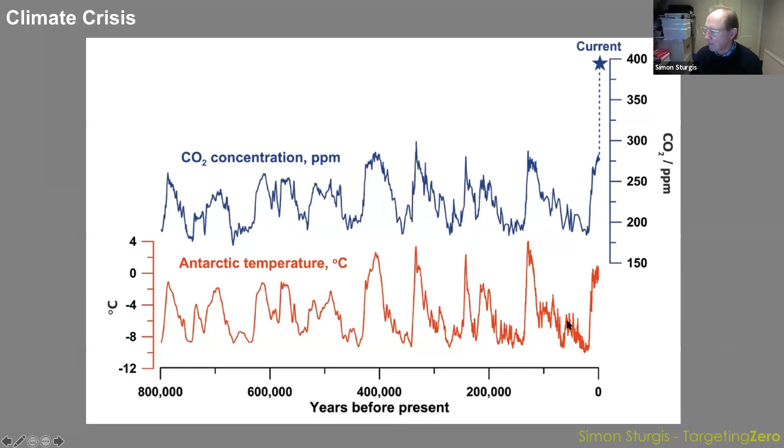Now, the disturbing bit is the top right-hand corner. You can see that carbon emissions are no longer following that rough cycle, but they have jumped right up. In fact, they're above 400 now. When this graph was done, only a few months ago, and since then it's got worse. So the concern and the prediction is that the temperatures are going to follow suit. That is the basic bit behind this.

Without going through these in great detail, you'll notice that fundamentally the same people are offending, whether it's carbon emissions or resources. And in fact, the way we operate in the UK is about 3 globes worth, if everybody was to live like us.

So what I'm interested in is the carbon emissions from taking resources from the natural environment, turning them into buildings, using them over the life of buildings, and then what happens to them at the end of the life, and the carbon emissions associated with all of that.

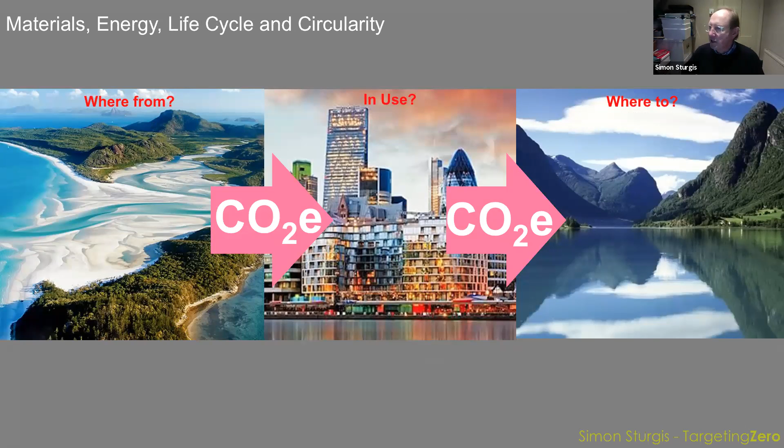We're all used to operational emissions, the use of energy which can generate carbon emissions. But what's also very important is the embodied emissions, which come from construction, material fabrication, and maintenance, repair, and replacement. Very crudely, these are roughly equivalent—not exactly the same. In some buildings one will be much more than the other, but they're not massively different, and they're also linked.

Activity in one area can produce impacts in the other area, and of course they will have a direct impact on global warming.

All of that filters through into guidance produced by different organizations. But it's also important to consider the investment context, because the world of money is starting to take note. They're worried about it because of risk, and it's going to cost them something.

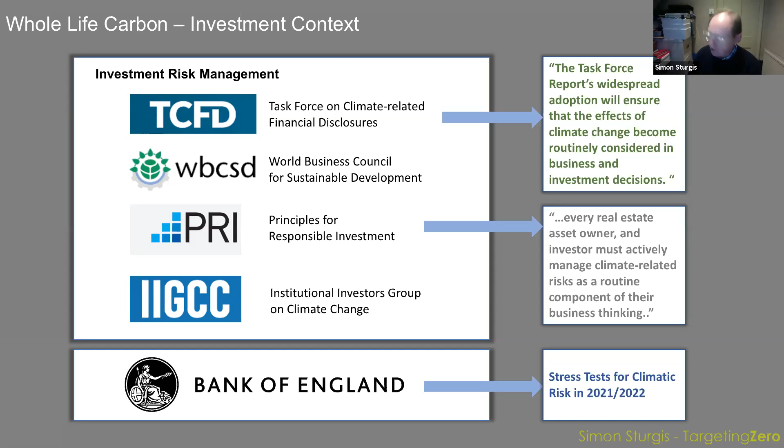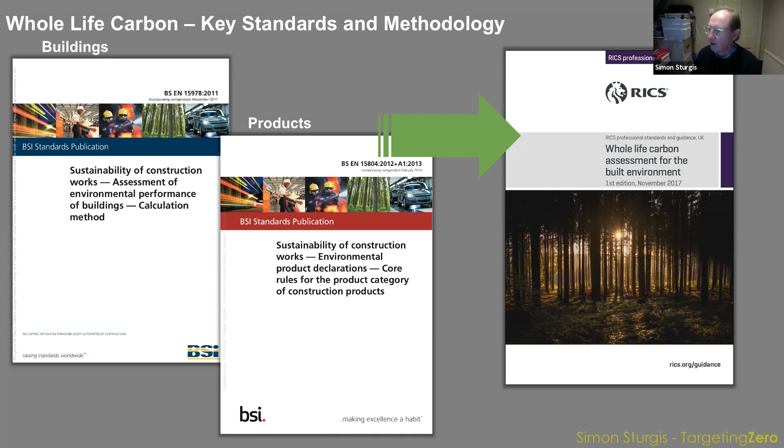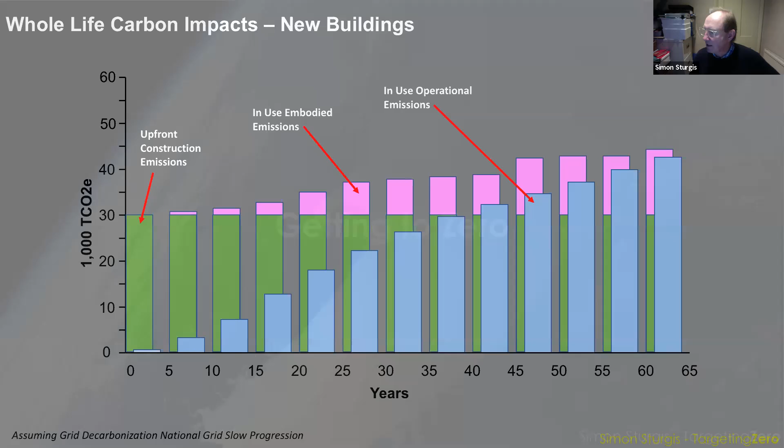So getting to zero, how do we get down to zero? There's a range of things that, in a practical design sense, are the things you would consider in order to reduce the numbers, but also make practical sense.

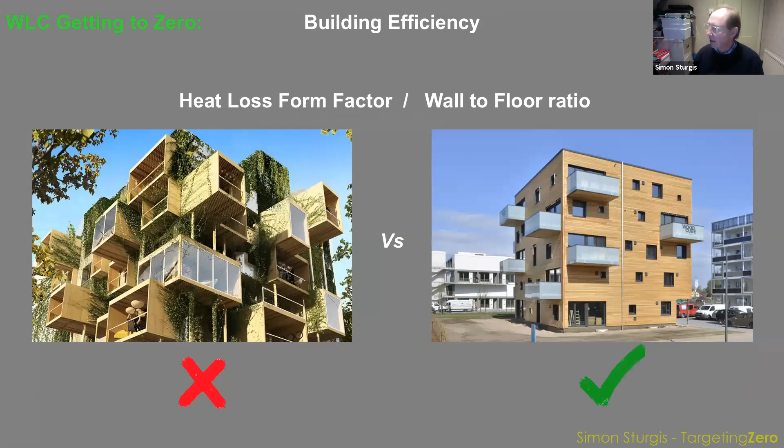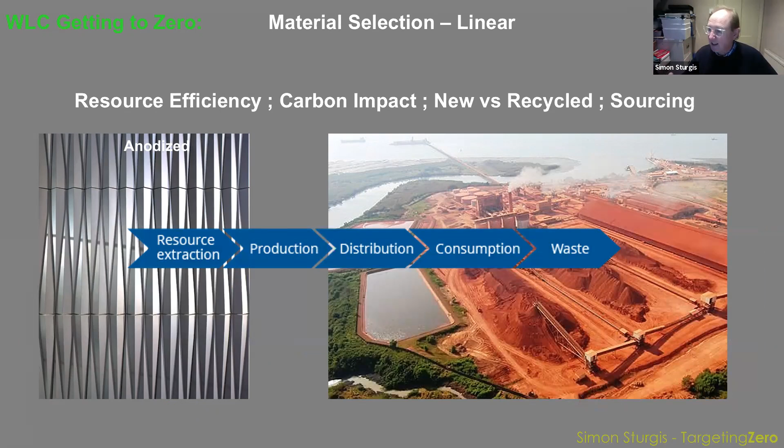Then material choice is a sort of linear versus circular issue, and this example shows anodized aluminium, which because of its nature requires a consistent color for the aluminium, because the anodizing is a very thin chemical reaction to the surface. To do that, you have to have virgin aluminium, so it has to come from somewhere—that happens to be in Australia. If, on the other hand, you use powder coating, which is effectively a paint, you can use recycled aluminium. But of course, you also have to consider things like the lifecycle options and so on. The point I'm making really here is that a seemingly simple choice about something like finish can have a big knock-on impact in carbon emissions.

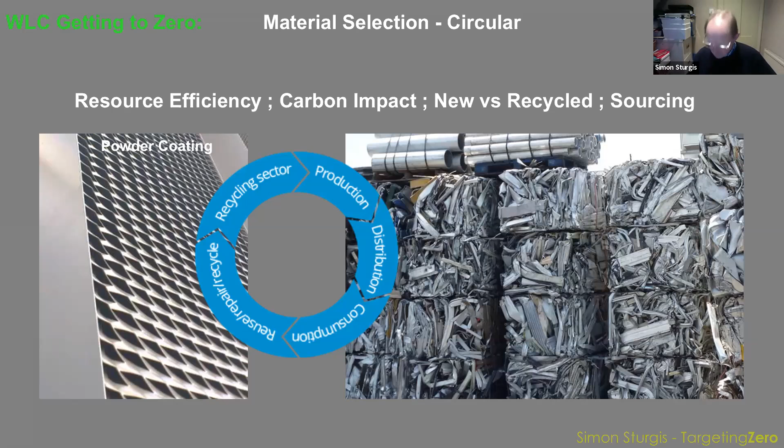So the linear economy is pretty much what it says: you get a material, you turn it into a product, you use it, and it goes into the bin. A recycling economy is better in the sense that you reuse things, but ultimately it ends up in the bin as well. And a circular economy is obviously idealistic, but it's where everything gets reused and is designed to be reused, and nothing ends up being thrown away.

Products and construction - MMC, modern methods of construction, is the ability to make things in a factory, which reduces waste and damage. Also, the ability to disassemble buildings, shown on the right, is an important part of how buildings or their components may be used in the future.

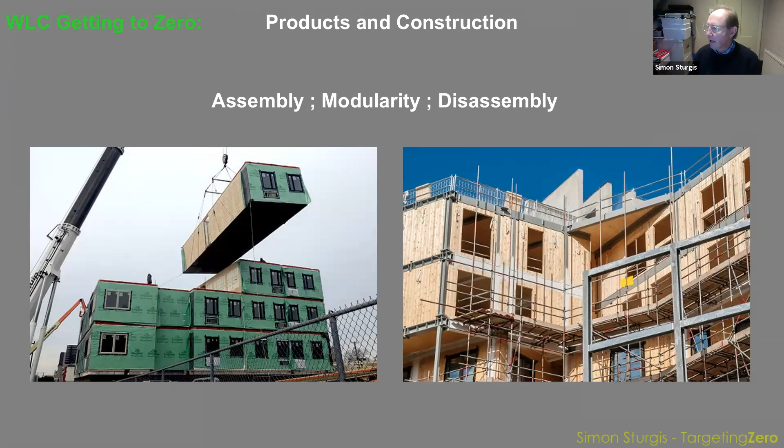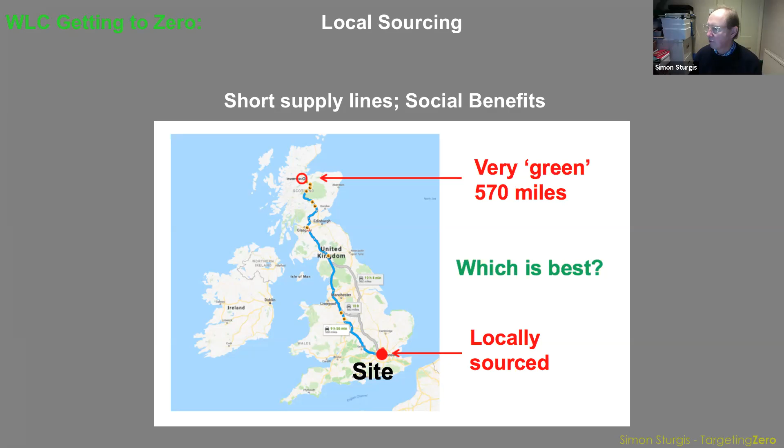Local sourcing has short supply lines, less diesel use, but also social benefits. This map illustrates getting something very green, but from Inverness. Is that better or worse than getting something locally sourced which maybe isn't quite so green? It depends on the detail, but it makes the point that it's not automatically good to get a green product - you need to know where it's come from and how it's got to you. This is really about operational and embodied emissions being considered together.

This example of use of resources - natural ventilation - is the Everyman Theatre, Stirling Prize winner, by Haworth Tompkins Architects. On the roof, they built cooling towers out of brick, which supplanted mechanical plant. So you had an embodied saving and an operational saving, but you'd have to balance those out and understand how this worked.

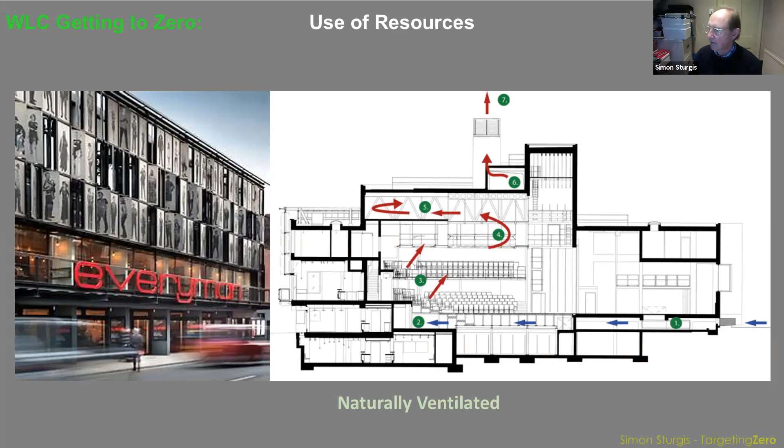In terms of cost, here's an example - this was the Google building in London, King's Cross. We found that in every single tender, the lowest carbon option was also the lowest cost, which demonstrated that the image of sustainability being expensive is not necessarily true at all.

This was also demonstrated in a study we did for a developer on a finished building. Looking at those four columns, the left-hand column shows the as-built carbon emissions. The next one along shows what we demonstrated could have been done. The QS said those reductions were 75% cost neutral - they weren't strange technology, just perfectly straightforward choices. The other 25% was capable of being tendered, they felt. So this is not an expensive business - it's actually about more efficient use of resources.

Life cycle is very important. This graph on the right looks at the replacement cycles of components, overlaid with the blue bands, which are lease cycles, to see how efficient the whole life of the building is likely to be. Overlaid with that is the yellow, an impression of global warming. Can your building be readily adapted in the future, or is that really complicated to do? It's about thinking long term about the life of our buildings.

I think we're all familiar with this kind of Victorian terrace house, which probably has as many variations as possible, ad infinitum, but they've proven a really popular, successful, adaptable, durable and flexible building type.

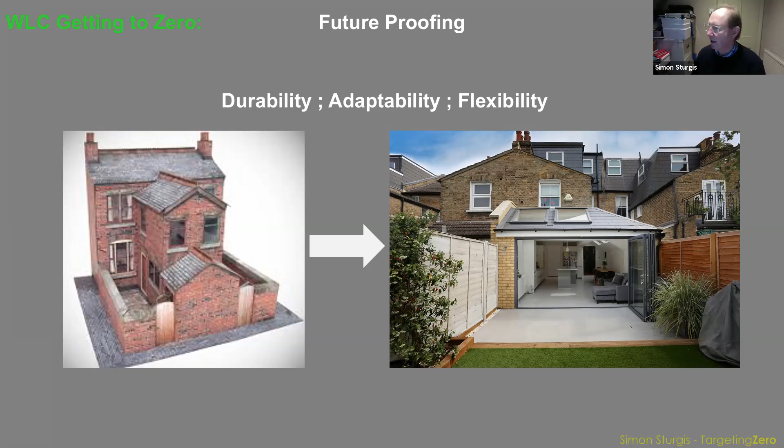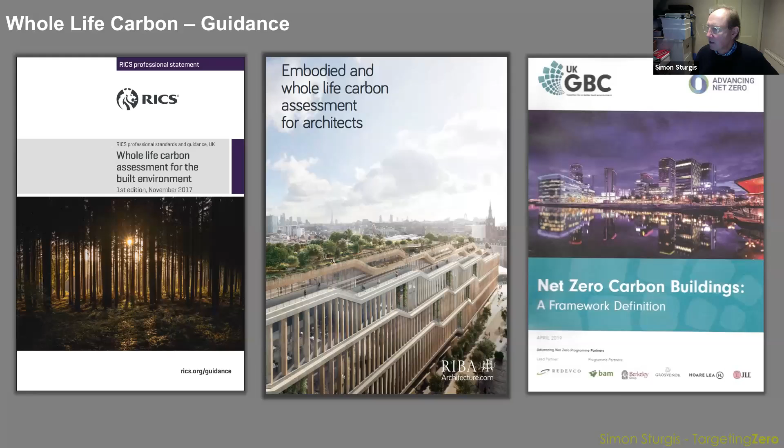And frankly, as we're all working for clients, it reduces the risk of obsolescence of their building. So thank you very much, that's me done.

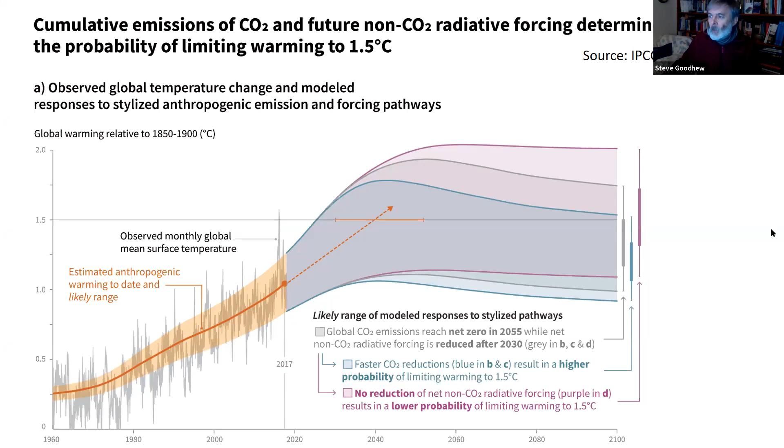As you can see, that orange line in the middle is the anthropogenic warming which has taken place since 1960. As per Simon's graphs, it looks like we are going to be hitting approximately 1.5 degrees relative warming by approximately 2040. One of the main drivers for this is cement emissions, and I'll show you that in a second.

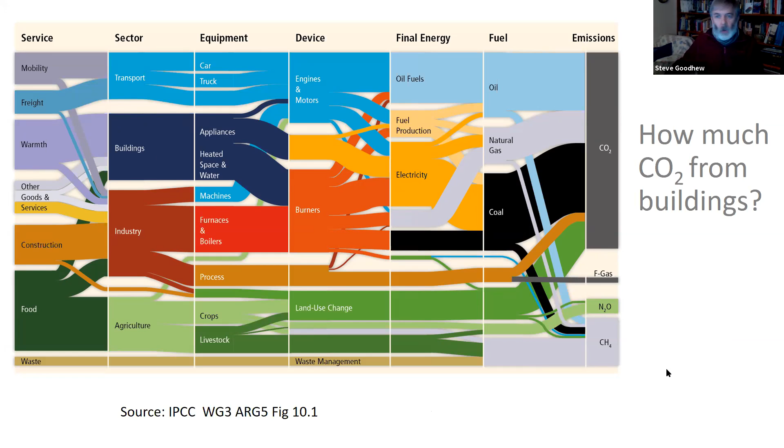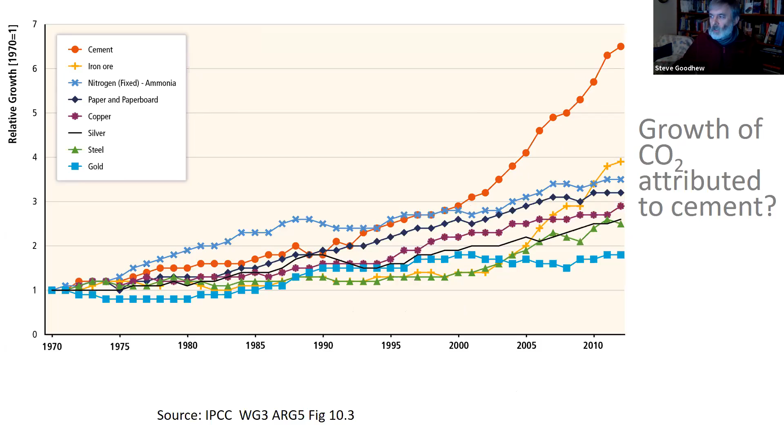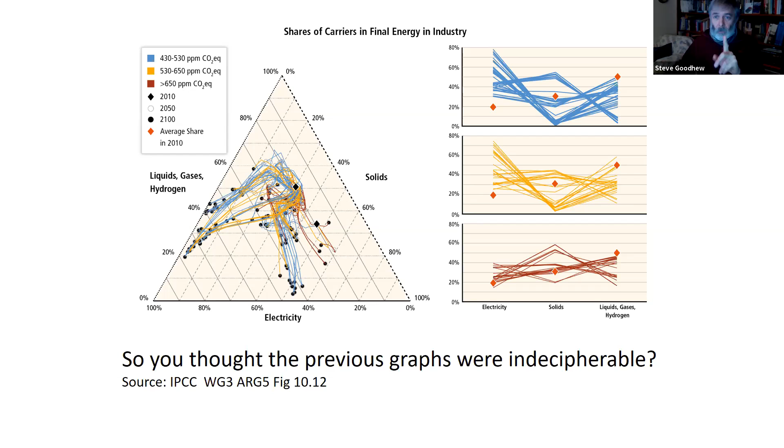Just to let you know that not all graphs are really, really appalling except for this one. I just wanted to put this one in just as a bit of light relief, just to say I can't understand it, and I'm not sure anybody else does. So feel free to send some comments about some of the other ones that I've been putting up.

So therefore, what are we going to need to do? Well, we need to avoid the use of high energy materials like cement, except where necessary. As Simon said, there's a durability aspect to our buildings. We need to make them low maintenance as well. And we need to reduce the amount of waste that goes to landfill. So we need to really be able to build with a material that does those things.

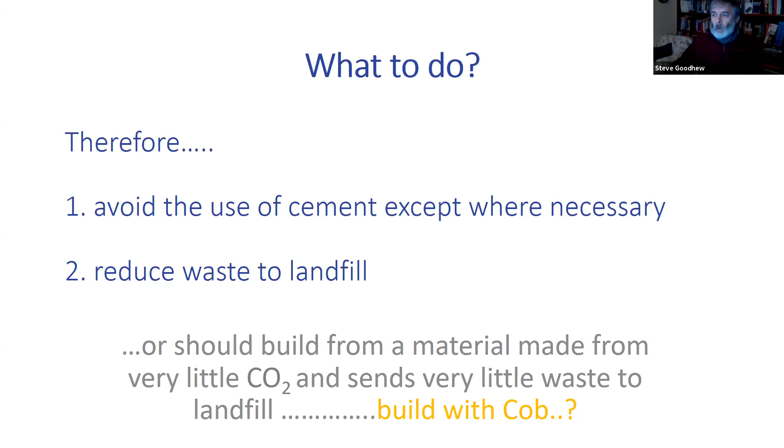One of the opportunities that we've got is to build with a lot of natural materials, and in particular cob. Now, the reason for coming down to cob, as far as the CobBauge project's concerned, is it's a vernacular material which has been used a lot in the southwest of the UK and also in northern France. So it's a familiar material, a familiar type of building. So why not build more with this?

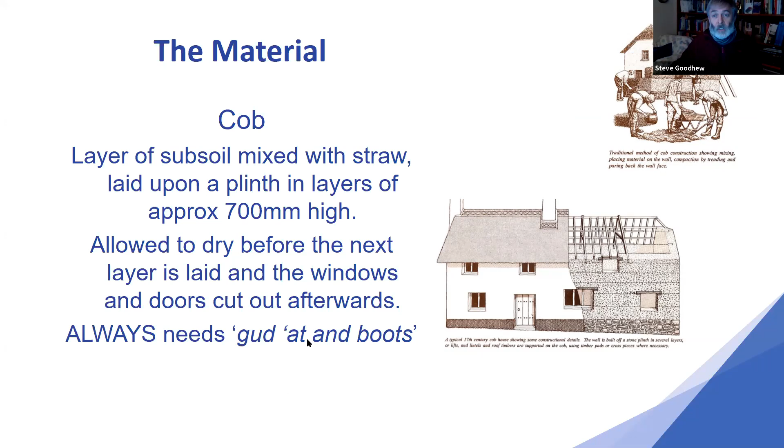Cob is a mixture of subsoil and straw built in approximately 700mm layers on top of each other and topped off with an appropriate roof. This is the way it would have been built a long time ago, around the turn of not this century, but the previous century. The main adage was that you always needed to give it a good hat and a good pair of boots. In other words, you needed to keep the water off the top and off the bottom, because that was what would make the material deteriorate.

But there are many properties in and around the southwest of England and in northern France that are well over 200 years old that have been built with the material. So it is a durable material if built properly. So if you're going to build with it again, what's stopping us? Why can't we build with it now?

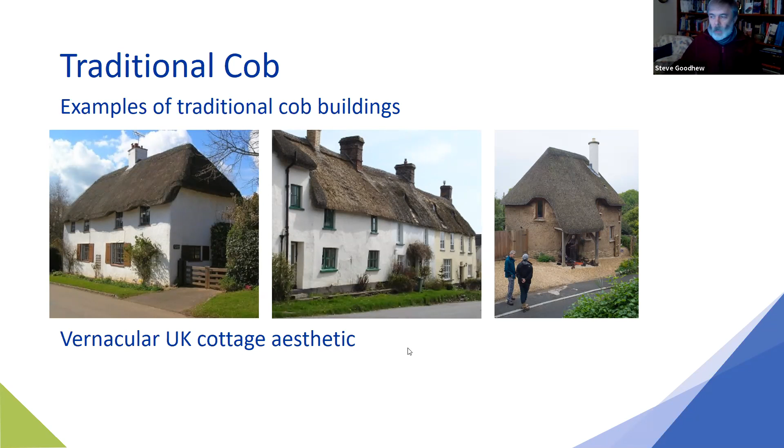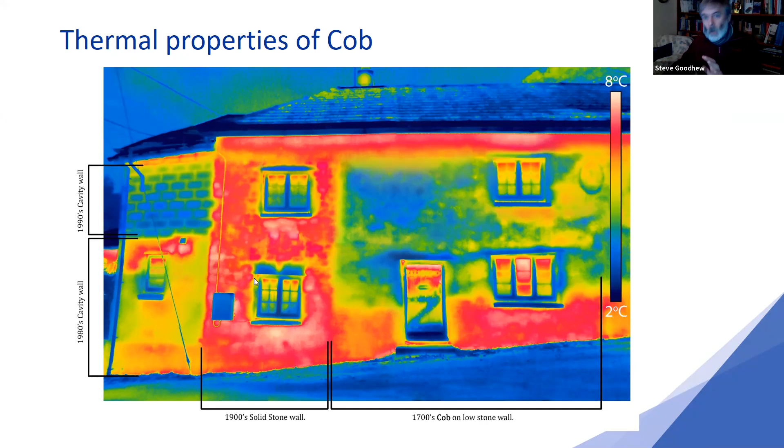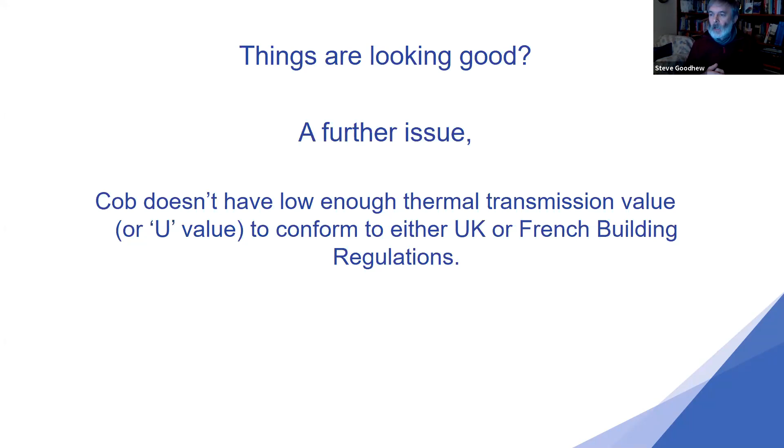So in essence, cob as it is, unmodified, should be able to perform just as well as a 1990s cavity wall, U value or no U value. This thermal transmission value, however, is not right for cob. To get through the building regulations, we're looking at approximately 0.3 watts per meter squared Kelvin or less, and cob does not have that. The project itself, therefore, is to try and take cob and get it through the regulations.

We're the lead partner within the project, and we have 3 French partners and 2 English partners beyond ourselves. That includes EBUKI, Earth Building UK and Ireland, and also Hudson Architects in Norfolk, and Anthony Hudson is a big supporter of ours, I'm very glad to say.

So what we've done up to now is we looked at 20 mixes of cob, some using soils from the French side, some from the UK side. And we also looked at a number of different fibers to see whether we could maintain the same structural properties of cob but get it through the building regulations, putting a thermal and a structural mix together in one system. Lots of measurements were undertaken in laboratories this side of the channel and also on the French side.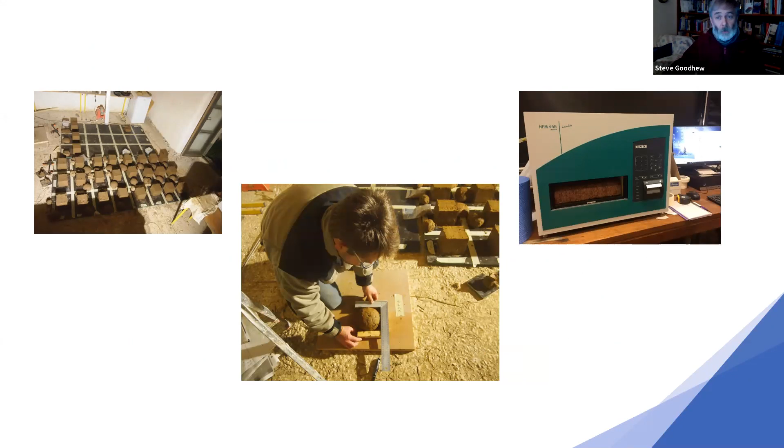And I've got to say, we have some very industrious French partners. This is Francois Streif, who is the architect in one of the regional natural parks, who looks after an awful lot of cob buildings in and around his area. And we found that, frankly, no, it wasn't possible. We couldn't get the structural values alongside the thermal values out of one cob mix.

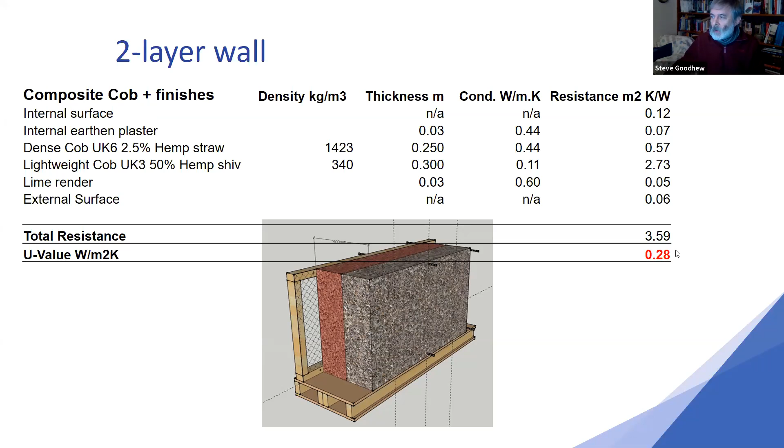So what we've proposed is a dual wall, a composite wall, one which has got a very low density layer, a density here, and this is a typical U value calculation. Apologies for those people who are not that keen on numbers, but it is a very simple set of calcs here. We've got a layer here which is representing the dense cob, and we've got a layer here which is representing the lower density cob of about 340. And if you do the calculation, using the thicknesses approximately of a normal wall, we can end up with a value of about 0.28, which is below 0.3, which is actually what the regulations require.

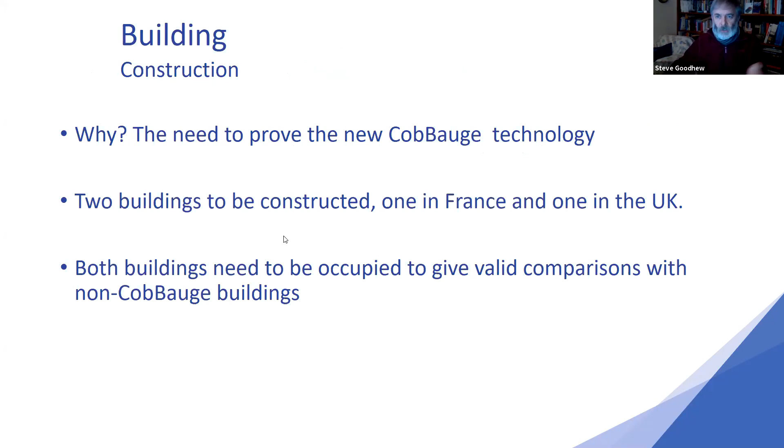So our next phase, the second phase, is looking at building, monitoring, networks and training, and to try and roll out the technology. Now we've gone through the laboratories, now you need to be able to get it to market, inverted commas. And the networks and training, well, you need these people out there that know how to use the particular material, and you also need to contact contractors that are interested, clients that are thinking of it, designers that like to use it.

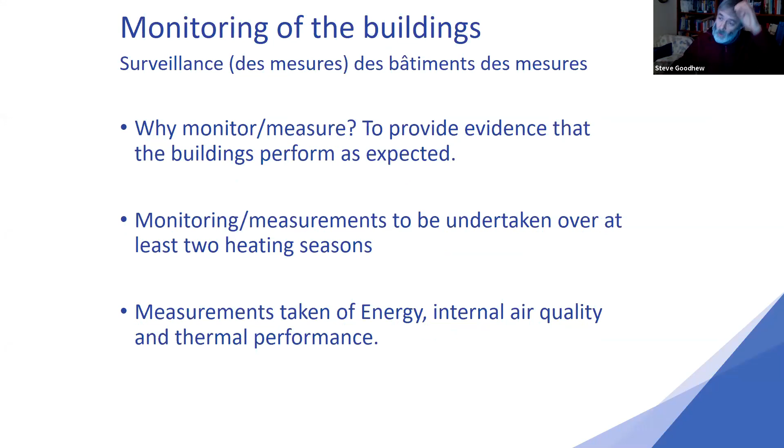So one of our major raison d'etre is actually to talk to you people and see if you're interested. And we're also looking at monitoring over 2 heating seasons, because there is no way that only laboratory measurements are good enough really to persuade people to use this particular material. So one of the things that we've been doing past thermal testing, and looking at a series of results, is to take some of these frankly prototypes and build with them.

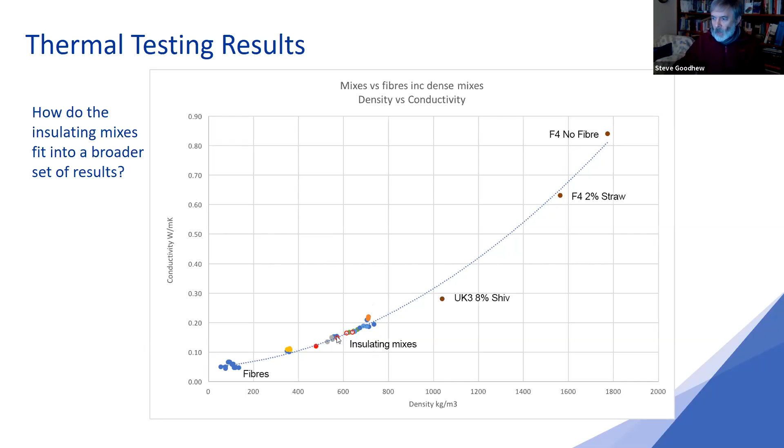And we had a choice here. This is a graph of thermal conductivity against density, and here are our insulating mixes, and here are the structural mixes, and we've picked out a couple of mixes here that we're going to start physically using to build with and to get through the building regulations. And this is the stipulation, as I mentioned before, the 0.3 that we need to go through.

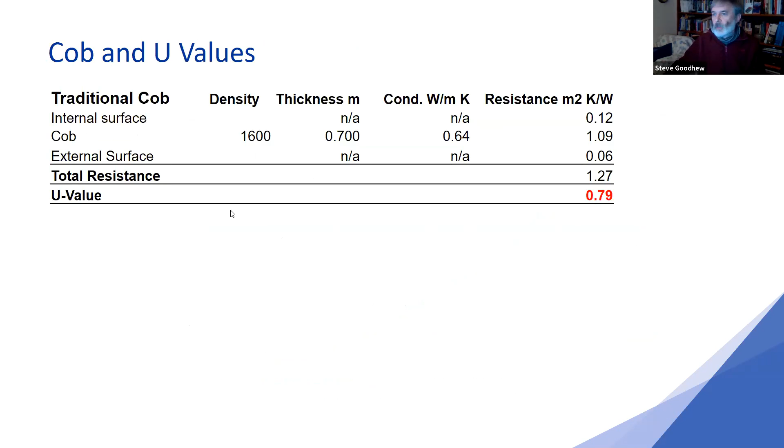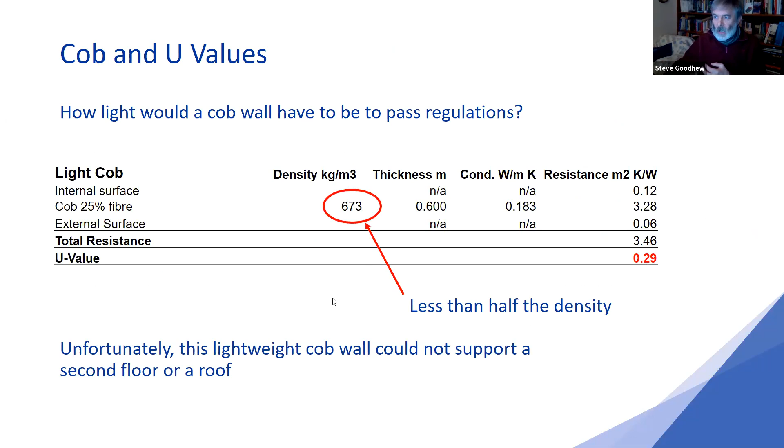Now, if you were to use traditional cob, you would actually get a calculated value of approximately 0.79, which is miles above where you want it to be. And if you actually wanted to get to 0.3, you'd need a thickness of about 2 meters. So no, this is not going to work as far as the values that you need for the wall. And one of the rationales for not being able to use one single mix was if you chopped half of the density, you would then get approximately down to 0.29, but the structural properties would not be able to hold up a building. It's an insulator, so unsurprisingly, its strength is quite low. However, our dense light gives us our value that we physically need for our building regulations.

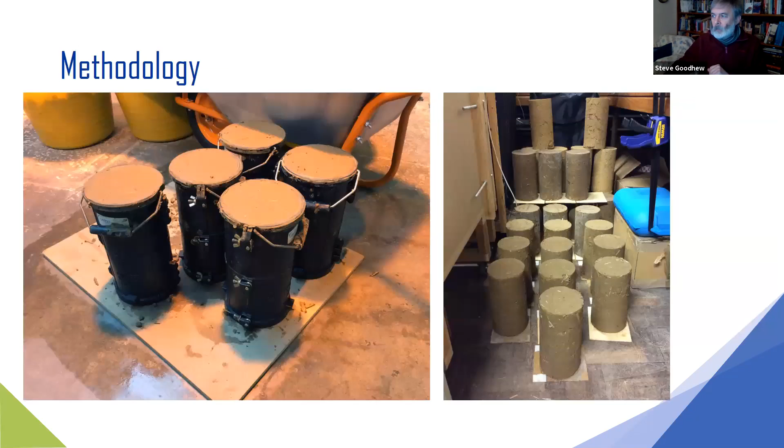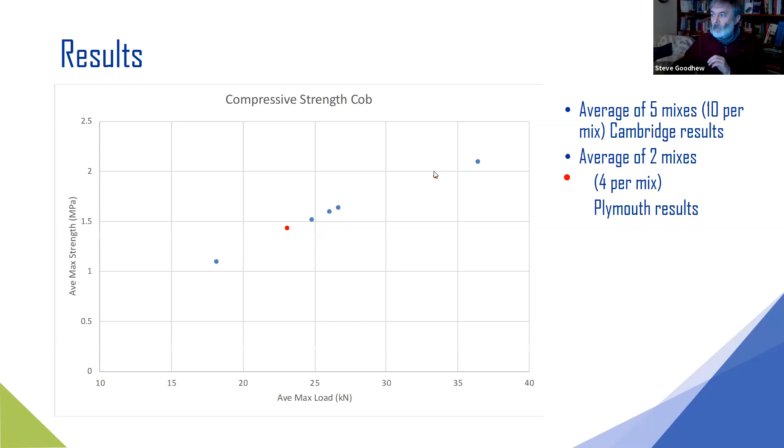So we've worked it through. We've done all our structural testing on our structural side. We went to Cambridge University and squashed 50 of these cores to make sure that we were getting exactly the right mix. And these managed to give us a series of results, which for one in particular of the French soils and one of the UK soils mixed with either flax or hemp, gave us a perfect series of measurements for the structural mix. And the compressive strength varied a bit, certainly we had a couple of outliers. We got some very good results with certain particular properties.

And life cycle assessment, oh, look what I've just pointed out. Thanks, Simon. And there's also the BSRIA guide, which is the ICE, which gives us the ability to look at the embodied energy. And unsurprisingly, the embodied energy of our particular material is very low, especially when you start comparing it with things like a masonry wall.

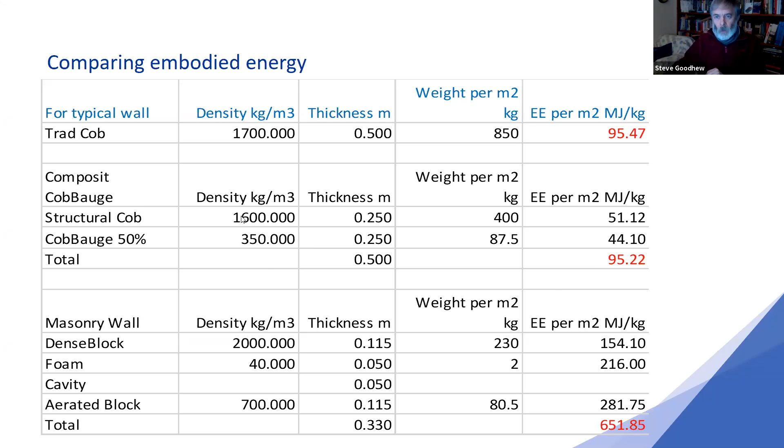And this is a cob wall that you can see a calculation for, which gives a value of about 95 megajoules per square meter, versus a masonry wall of 651. These are rough calculations. We have got SimaPro now that we're going to be using and doing calculations to the ISO, which is then going to give us some very, very pertinent values.

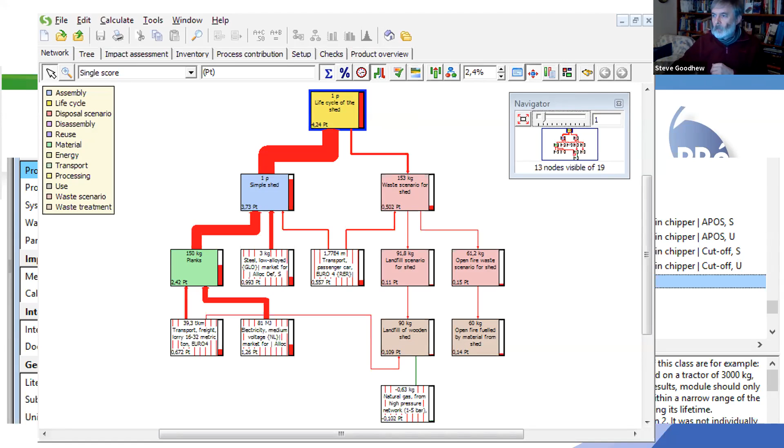And typically SimaPro, just to give you a very brief idea of what it does, breaks down all those sections that Simon was talking about before and uses the ISO standard 14040 to work out what your life cycle value is using the appropriate cradle to gate or cradle to grave, etc. boundary conditions. And one of the things that we would intend to do is look at a Environmental Product Declaration for the material, for which a life cycle assessment would be quite an important element.

Well, frankly, we've got a climate crisis now. So if you want to actually remove a lot of carbon quickly from this whole chain, it's better actually to produce with a much lower carbon footprint early on and then build up, because that gives us time. And that's frankly one of the things that we have not got.

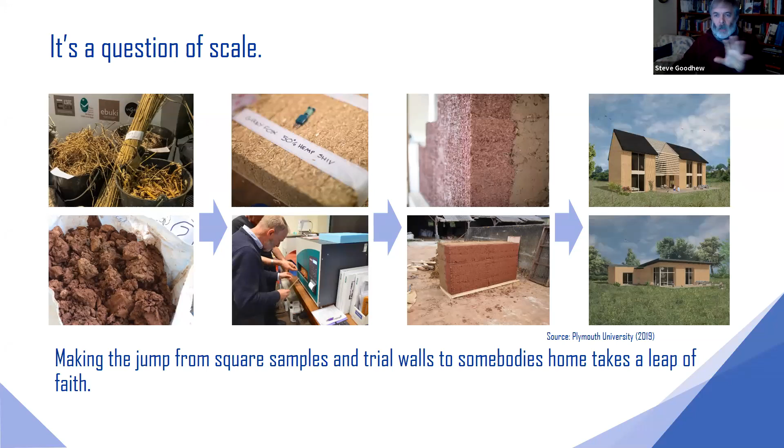So what's happening now? Well, we've got some prototype buildings which are going to be built. And what we are now doing is taking it to a question of scale, to build some buildings which allow us to work out how the detailing works. How do the foundations work with a building like this? Little tricky things. And the devil, as most architects know, is in the detail.

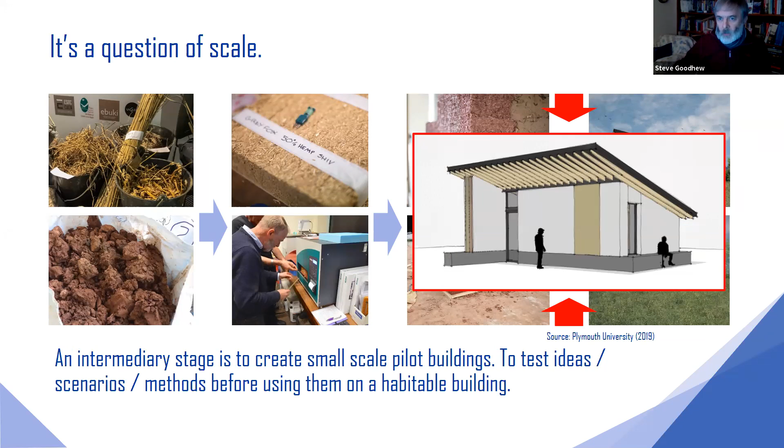So we've got permission from the university to put a building up on campus. Depending on how quickly, we hope to get through planning by about March next year and be able to start work on the building. The French side have already started. This is an artist impression of the building. They're going to be putting up the prototype building near Carentan in Normandy.

And this is, yeah, I know, concrete foundations, please don't shoot me, please. I didn't build that bit.

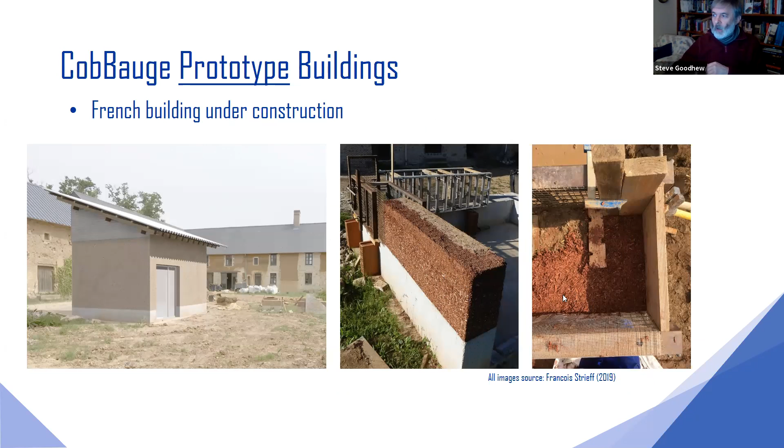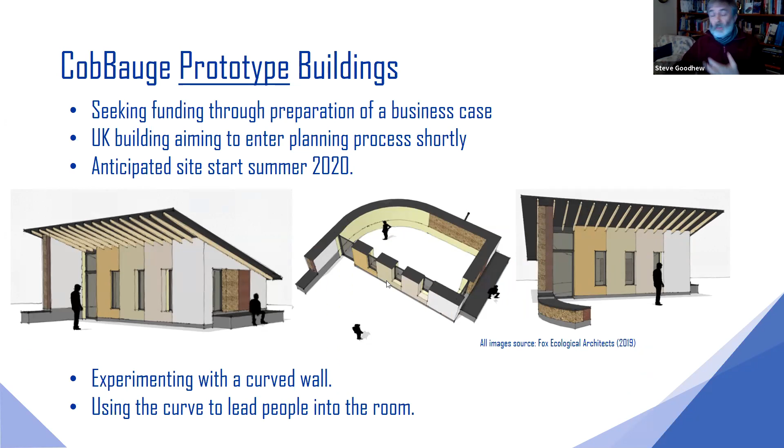But this is a typical view of the first lift of the wall going up, using shuttering as we go around, and you can see it's got thermal corners to stop thermal bridging, for instance. And all that learning is going to be put into the CobBauge prototype building, which is going to be going up on the Plymouth campus. We're going to be experimenting with things like a curved wall. We're going to be looking at overhanging monopitched eaves.

And also we're putting up walls, and hope to be able to come back to this series of talks and broadcast live from the civil engineering laboratories once the COVID restrictions have lightened up a little bit, and physically show you a wall being built during the actual presentation. We're also, as I say, looking at the details, in particular how all this is going to work. And I must admit, Fox Ecological Architects have been really, really helpful in this area, because Anthony and his team have been looking at that very carefully.

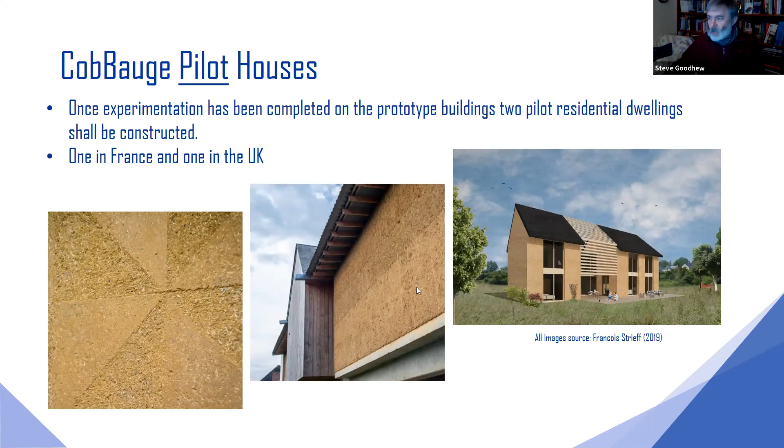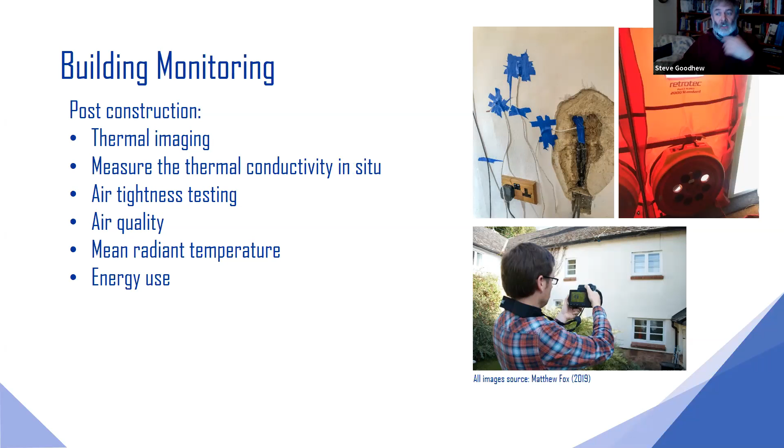And we're also going to be monitoring the buildings, because we need to prove to our clientele, our designers, the public in general, that they are working as far as their conductivity, their air tightness, the air quality inside, radiant temperatures and energy use. And we're going to be using a mixture of thermographic elements. And this is the one that I promised would pop up a little bit earlier. And as I said, here is the U value, 0.9.

This is a 1990s wall, so it should be about, I think, somewhere about 0.45. It's nowhere near it, but the cob is coming out at 0.9, just as good as a 1990s wall.

And this is what we're going to end up doing with our two prototype walls in the heavy structures laboratory, in the civil engineering labs in Plymouth, in W14 in the Brunel labs, where we're going to be strength testing it. We're hoping that our local building control people are going to come along and actually physically see it taking its weight up.

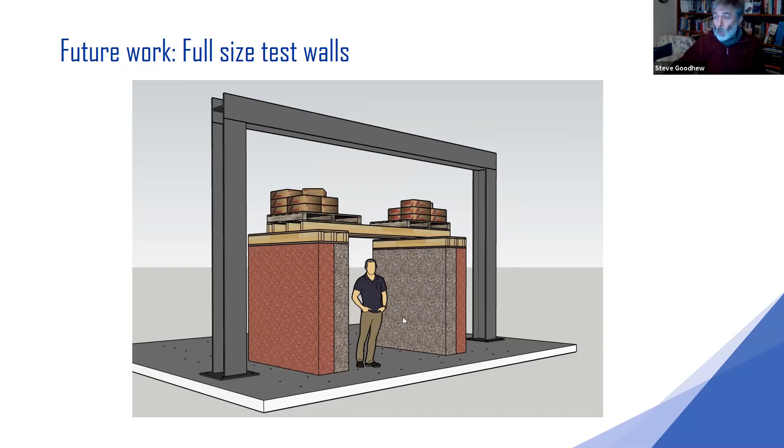Okay, well, thanks everyone. Thanks for asking me to speak, firstly, and thanks everyone for attending today. So what I'm going to be talking about is basically some practical examples of some of the things that Simon and Steve have already talked through. So thanks very much to Simon and Steve for setting me up on that front.

A little bit about me first, where I'm coming from. So I work in WSP's Sustainable Places team. WSP do a bit of everything to do with buildings and infrastructure, but I'm in the Sustainable Places team, and I'm based in Glasgow, but our team is all across the UK, really. London, Bristol, Manchester, Exeter as well. So there's people in my team working across the country.

I'm also part of the RIAS Sustainability Working Group, and the Sustainability Committee convener for the Glasgow Institute of Architects Council. And I'm also Deputy Chair of the Construction Industry Council 2050 group, really trying to mainstream some of the topics we're going to be talking through now in this presentation.

So, agenda - a little bit of a reminder of some context. I'm going to talk you through terminology before we get into the thick of it, a couple of points on some embodied carbon guidance not overlapping with what you've already heard, a little bit on tools you might use to do this sort of analysis, and then get into some case studies once we've got set up for that.

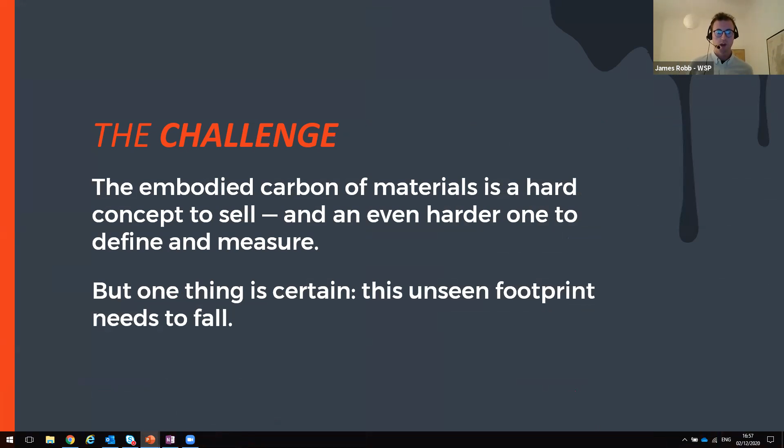Okay, so firstly, what is the challenge? Embodied carbon is quite hard for a lot of people to visualize and even conceptually understand, so hopefully you'll have a better idea of it after these slides today. The one thing we do know with some certainty is that it needs to come down, so it's something we should be acting on as building designers.

What is embodied carbon? It's the carbon footprint of materials - the greenhouse gases involved in creating that useful component or material for you to put in your building.

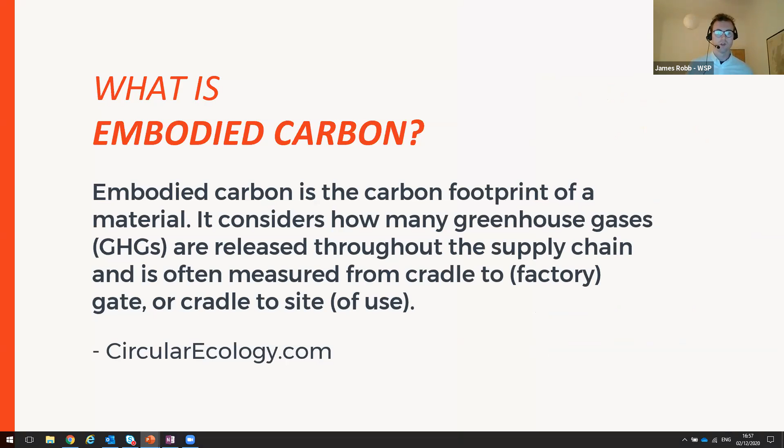One positive thing, I guess, is that it is moving up the agenda of business, and it did feature prominently in both the Architects Declare and Engineers Declare manifestos last year, with people like ACAN and LETI starting to bring out much more guidance on how to address it.

So actually, Miles, there's the first poll here - if you can bring that first question up, please. So, first poll: what proportion of a building's overall carbon footprint can be attributed to embodied carbon? What's your thoughts on that? I don't know, Miles, if you're able to show the results in a minute or so.

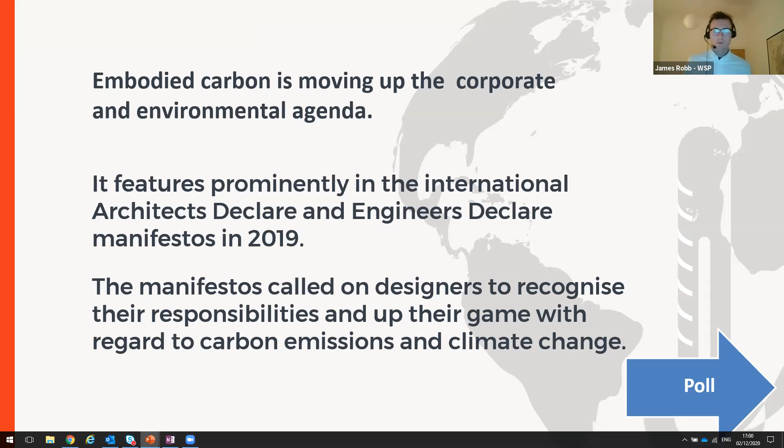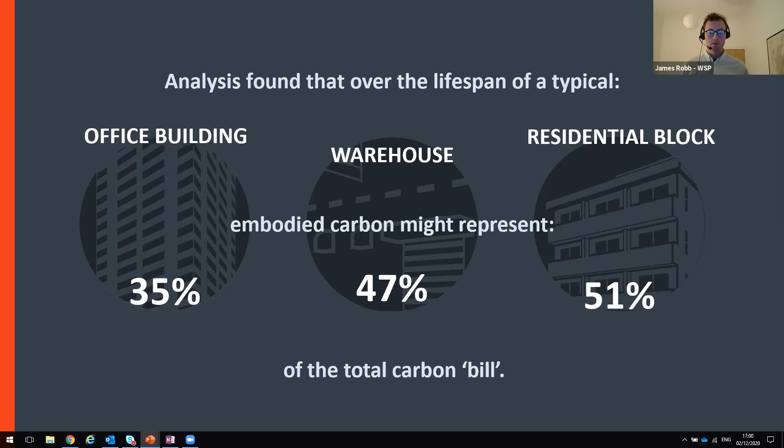Now, terminology, before I go any further. I just want to run through these terms, which you may have come across before, and just make sure we all understand them before I go any further.

So carbon - if we're talking about carbon, we're really talking about carbon emissions, which is in effect greenhouse gas emissions. We're talking about carbon footprint, that climate-change-causing emissions, and the unit we measure that in is usually tCO2e, tons of carbon dioxide equivalent. The 'e', the equivalent, is quite important to understand, because we say carbon as the term, but it's actually a catch-all for lots of different gases. We use carbon as the measurement scale because it's the most prolific of the greenhouse gases - other gases, such as methane, are orders of magnitude much more climate damaging. So by saying carbon, we're capturing all of those different gases in one unit of measurement, just for simplicity's sake.

Embodied carbon, what do we mean by that? It's the carbon expended in creating a material or component. So if it's a brick, it's the quarrying of the clay, taking that somewhere and burning it in a manufacturing facility to heat it into a useful product, and then all of those impacts - the transport, the quarrying, and the energy used for the heating - are included in that embodied carbon footprint.

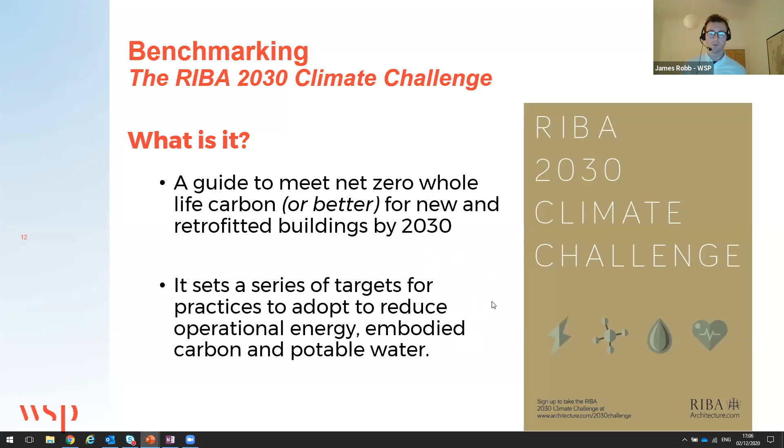So one thing to say about this is that it's almost the first time we've had a document setting out targets for embodied carbon across industry.

So before this came out, the LETI climate, designing for climate emergency, document also acted on this. Before these documents came about, we didn't really have a reliable target to be aiming for when we're doing these assessments.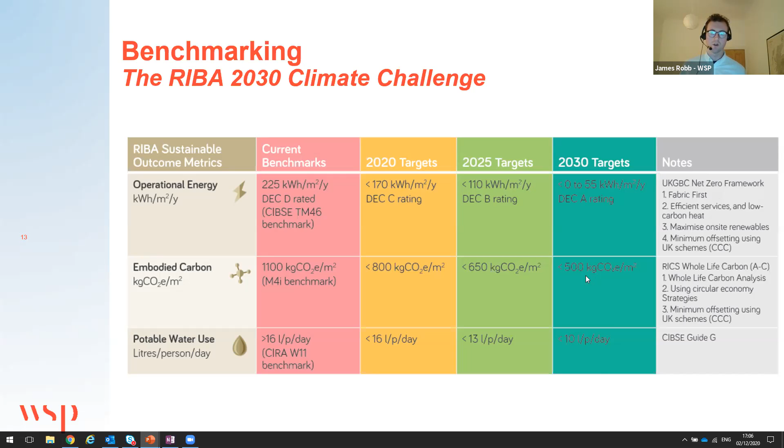So it's really good that they have now come out and there's something to measure against. There's another discussion as to whether these go far enough or if they're sufficiently robust, but at least we've got something now to measure things against, and we know how we're performing.

Next section is on software and tools. So some of the tools you might use to carry out whole building life cycle analysis are in this list.

The top two, eTool and One-Click LCA, are in green because those are the only two commercially available tools that are currently approved for use under things like BREEAM.

BRE Impact can also be used for BREEAM, but it's not as detailed a tool as these top two. So I'm using these two at the moment.

Other tools that are out there that you may have heard of: HBERT is a tool by Hawkins Brown Architects, which is a Revit plugin, free to download if you want to have a play around with that and you use Revit.

The Rail Carbon tool is something Network Rail set up a number of years ago for rail projects, and these tools are also around. So, Ecolab, similarly developed by an architectural firm.

EC3 is actually open source, so you can use this one free of charge, though most of the data seems to be North American at the moment, so maybe it's not useful for the people on the call, but useful to have a play around with anyway.

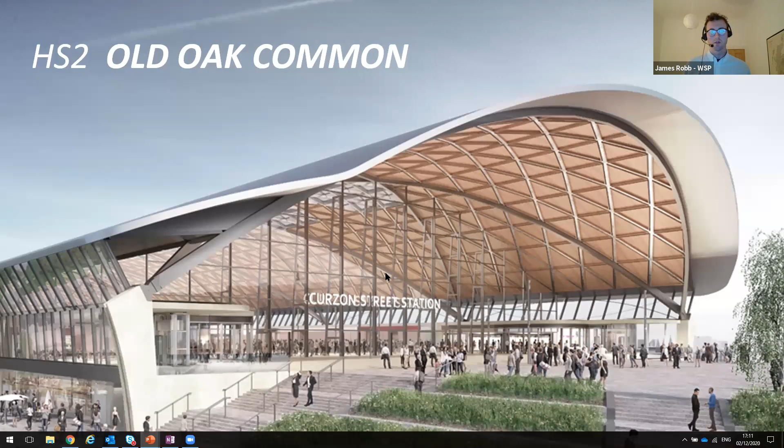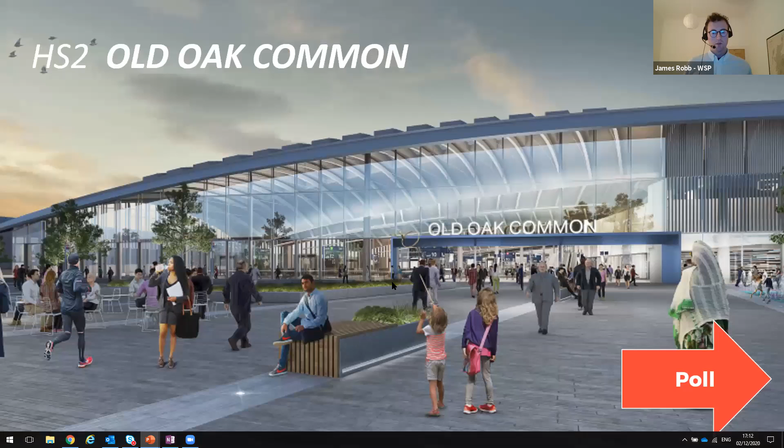I'm involved in the new build stations for the HS2 line. This one - that's the wrong title actually - but this is in Birmingham, Curzon Street Station, and that's an internal shot of it. Very large stations, effectively 16-platform super stations, as they call them. This is the one on the outskirts of London, Old Oak Common, and I'm also involved in the London Euston extension, doing the carbon management for those very large projects.

Next poll question here, Miles, if you can bring it up, thank you. So for these railway stations, which life cycle stages are responsible for the most greenhouse gas emissions over their whole life? Have a stab at what you think the biggest impact would be before we proceed. This is over 120 years because that's a standard lifetime assumption used in the rail industry, normally for bits of infrastructure, but they apply it to stations as well. So we're assessing them over 120 years in this case.

Thanks for that, Miles. So the results are, most of you think it's the choice of construction material - half of you think that - and almost a quarter think construction process, and another quarter operational impact. So yeah, most of you think construction, but a good spread across those three impacts. If I can flip on to the next slide.

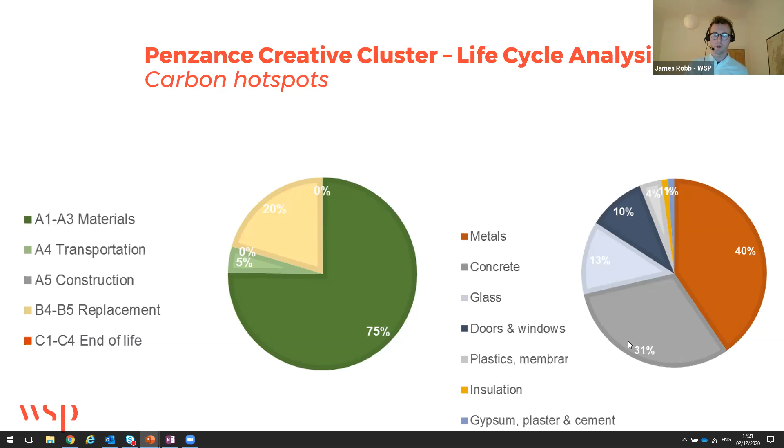Now, I suppose why the team are doing this is because Cornwall Council have a requirement for their buildings to meet BREEAM Excellent. So this analysis is done under BREEAM New Construction 2018, and so the way we've done the analysis is to satisfy that. The first requirement under BREEAM is to do that baselining and hotspotting exercise that I've just displayed.

The next part is to look in more detail at some aspects of the design. So there's a requirement to analyze the superstructure and some options around that. So that's what we're showing here, that we rated these 4 options. This is also the sort of code language you're required to use doing BREEAM. So this column is the baseline steel frame option. We then assess that against a concrete frame option and a timber frame option, so mass timber approach.

And also we reviewed leaving the frame as it is and just changing the window spec from the aluminium double glazed units to a composite aluminium timber window frame. So you can see clearly that every option we assessed would result in less total carbon footprint than the pure steel frame option. Concrete option would result in less carbon overall. The timber frame option here obviously showed the biggest carbon reductions.

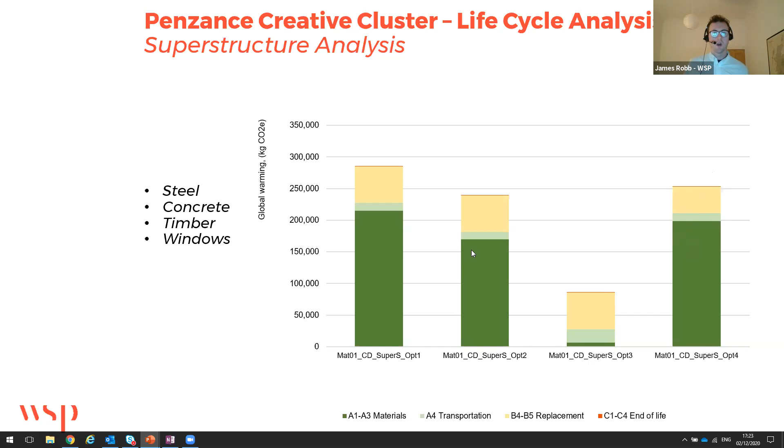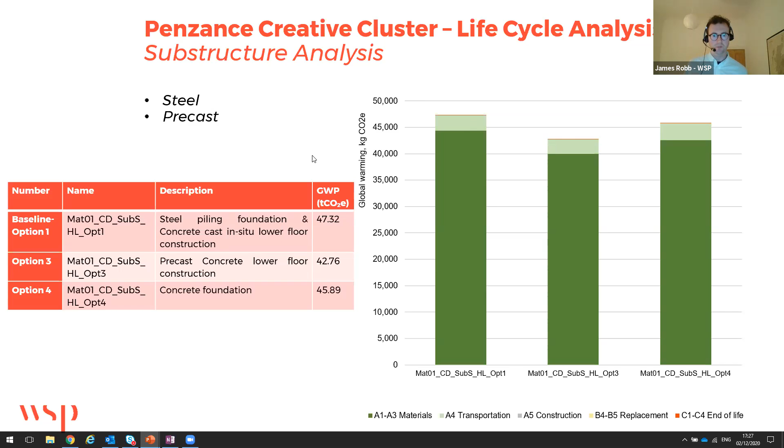This slide is showing getting into the spec. So this is on a different building again, the Featherstone building in central London, where we were able to, once the design was set in this case, look at different concrete elements of the design and work out what we could do with the concrete mix to get the carbon down. And as I said in the carbon hotspots, the cement in concrete is the biggest carbon hotspot. That's because it's so carbon intensive to make, the heat required to make it. So reducing the quantity of cement in your concrete mix is the major way to cut its carbon footprint.

So in this building, for example, pile caps, the structural engineers, which were HTS on this project, managed to design pile caps with 70% cement replacement, and they were happy that there was time in the program that they could do that. The more cement replacement you use, generally it takes a bit longer for the concrete to go off. So you've got to be in your build program to allow you to do that. The concrete superstructure elements like these columns, they reckoned 50% cement replacement was feasible to get the build program to work. So not as high as the substructure, but that was more to do with the construction methodology.

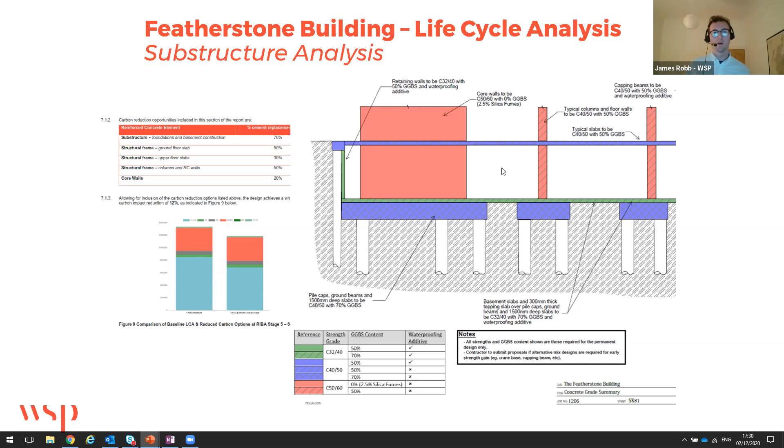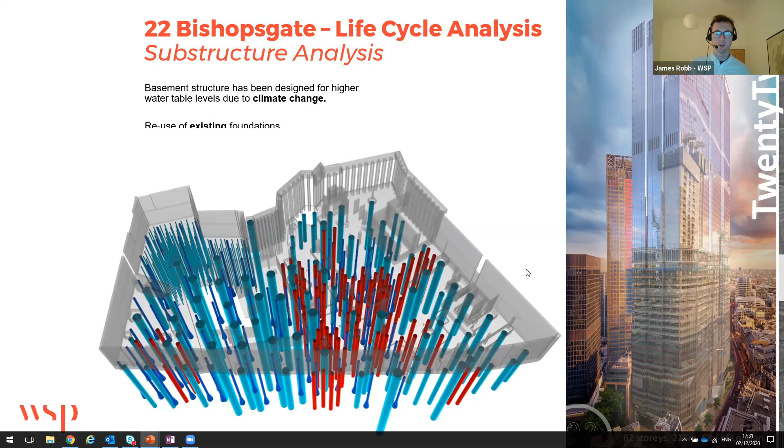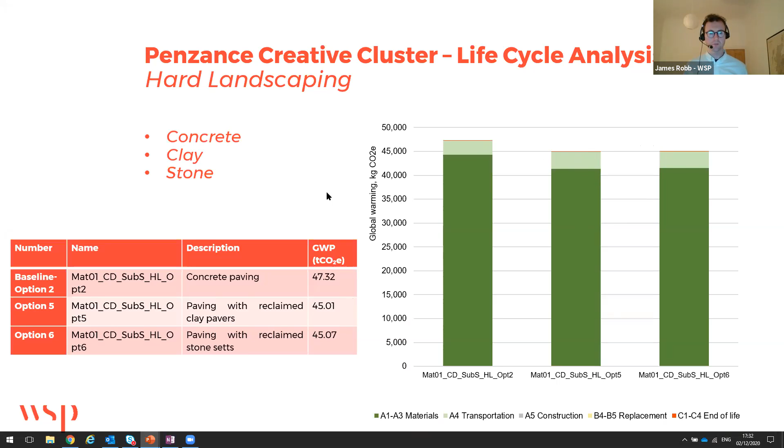Third option is looking into the insulation spec. So the insulation on this building was a mix of mineral wool and PIR, and we compared whether you could get rid of all the PIR and just go purely mineral wool. We found it was quite a modest saving, 1.5%, and that is because there's so little PIR really in the project. They're using PIR to cut the wall depth down. So if they moved to rock wool in those particular locations, the wall thickness would probably impact on the internal spaces too much at the stage of the job that they'd got to when we reviewed that insulation option. So we decided not to proceed with swapping out the PIR.

What I would say is that the rock wool is much less embodied carbon than any oil-based insulation like PIR or XPS. So if you can only use rock wool or mineral wool, that would be much preferred generally, if you can get that allowance in the wall thickness into the design early enough.

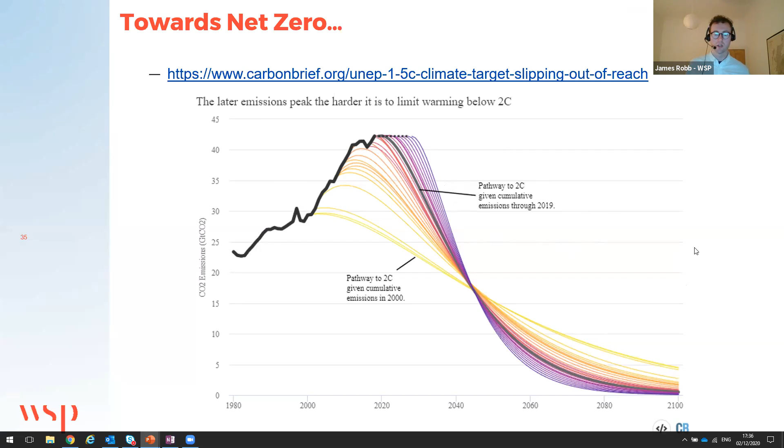So just to wrap up my talk, hopefully we're now on the pathway away from this peak of emissions, and we're seeing some instances of good things happening at a project level anyway, and things on the global scale like China's net zero announcement, net zero 2060, and probably USA coming back into the Paris Agreement. That's all good signs. We keep hearing more and more about the UK grid going without coal, so that's expected to increase, as I mentioned about decarbonisation of the electric grid.

Expect that to keep increasing, and we keep seeing more and more examples of records being smashed for tallest timber structure buildings. So for example, this is one from last year, an 18-story timber structure. This one's in Norway, and it's really good from my perspective to see these records being broken. It means we're carrying on building in these, well, they're not new materials, are they? Lower carbon materials, new old materials. And one more example of a timber frame building that I like.

This one's in Australia. So in Europe and around the world, we're seeing good examples now of these approaches to design, and my wish is that we'll see this becoming more mainstream now. That's what I'm pushing for in my work with the CIC as well. I think that's it from me.

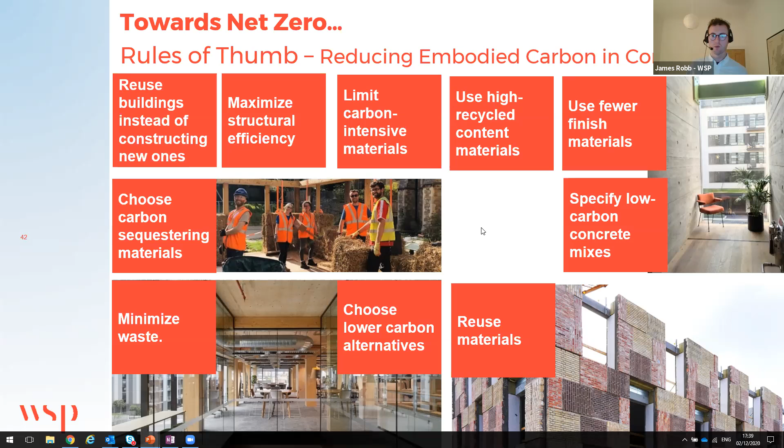And that's it for me. Thank you very much.